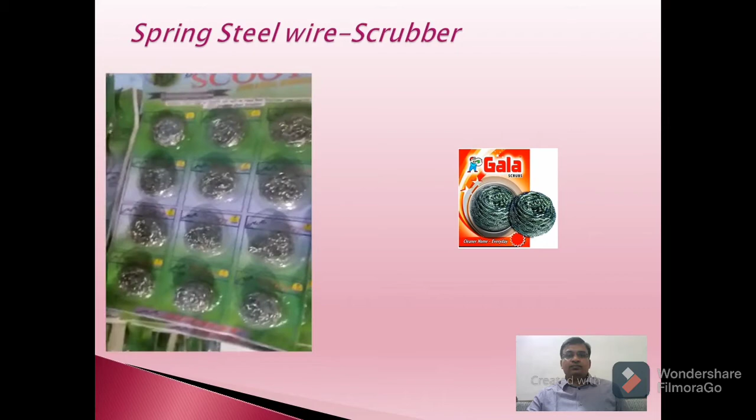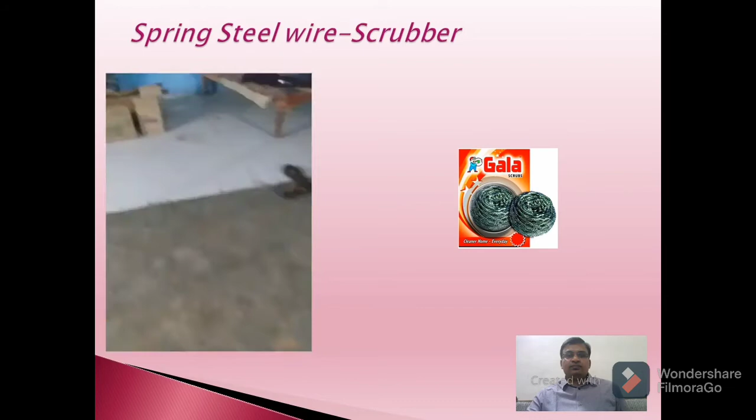steel scrubber. This is the most commonly used item in everybody's kitchen. Steel scrubbers are used to clean the utensils. In a country like India where the population is more than 1 billion, this steel scrubber has a huge potential in the market. So you can find in the video the scrubber making process.

It's a simple SPM machine, a compact SPM machine which does not require more than 2000 square feet of space for this business. You can see that steel wires in the bobbin are placed in the take-up and they are rolled in a flat rolling mill as seen in the video, where you can see that scrubbers are made automatically in this machine. In this, coolant is also used for heat dissipation. You can see the wires are not entangled with each other. This is the only thing that you have to take care of during the manufacturing of the scrubber.

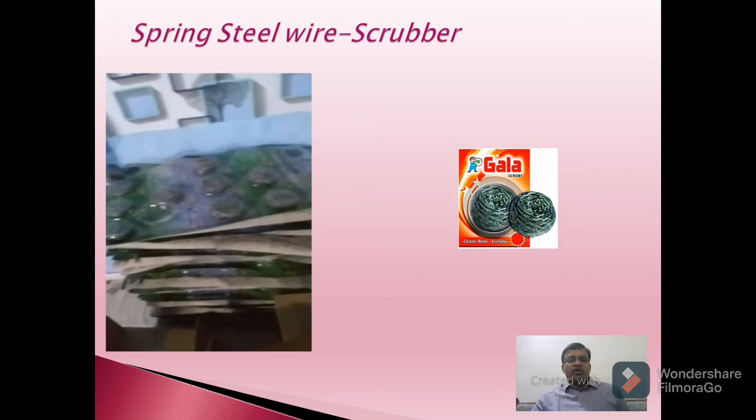The weight of each scrubber is found to be 10 to 12 grams. As far as the machine is concerned, this is a simple compact SPM. In India there are 3-4 locations where this machine is manufactured. You can easily get in touch with me for the machine manufacturer's details. Apart from this, there is a scrubber making machine as well as a scrubber packing machine. You can see that each scrubber has plastic packing, and it is sold in India by the dozen. You can see it in malls, in shops, in any shop; different varieties and different grades are available in India.

The technical aspect and the commercial aspect of this steel scrubber making is as follows. The wire required is SS grade 430/410. The wire size required is 0.13 mm, and these wires are supplied in bobbins. Each bobbin weighs around 16 kg. These bobbins are plastic bobbins. And the most important factor is the price of this wire, ranging from 147 to 150 per kg in India. There are various suppliers in India, but one of the prominent suppliers is Bansal Wire.